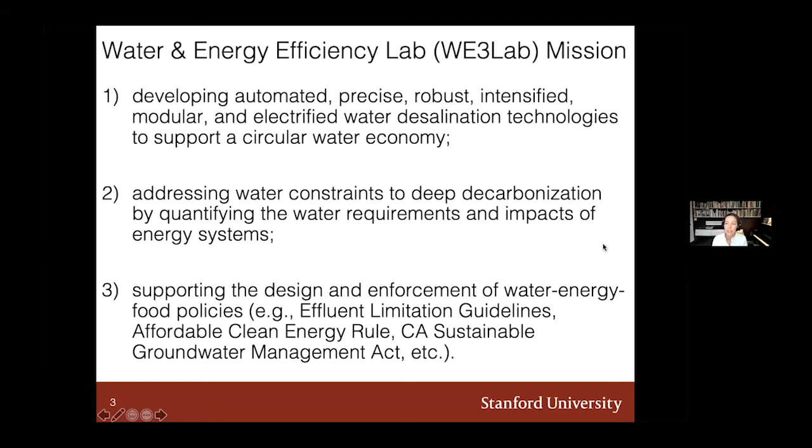The National Alliance for Water Innovation's mission is to secure the nation's water supply through energy efficient and cost-effective water desalination and fit-for-purpose reuse. The reality is that our conventional water treatment systems were really designed to exploit an ample supply of fresh water to basically treat things once through, send it through a distribution system, treat that wastewater, and be able to dispose it readily into the environment.

We know today that changing precipitation patterns, increased urbanization and water demand, aging infrastructure systems through which water is distributed, and regulatory limits on discharge are all driving water users to turn to non-traditional source waters. The issue is that in treating these non-traditional source waters, we incur more costs but also expend more energy. So we're really focused in NAWI on understanding what technology innovations are necessary to facilitate a circular water economy and exploit non-traditional water sources, including water reuse, especially to augment and secure our water supply.

A key aspect of our mission is to try to make these non-traditional water sources more cost and energy competitive with traditional sources. So we've set this goal of 90% of non-traditional water sources achieving pipe parity through our technology development efforts. But a lot of that success hinges on how we define pipe parity.

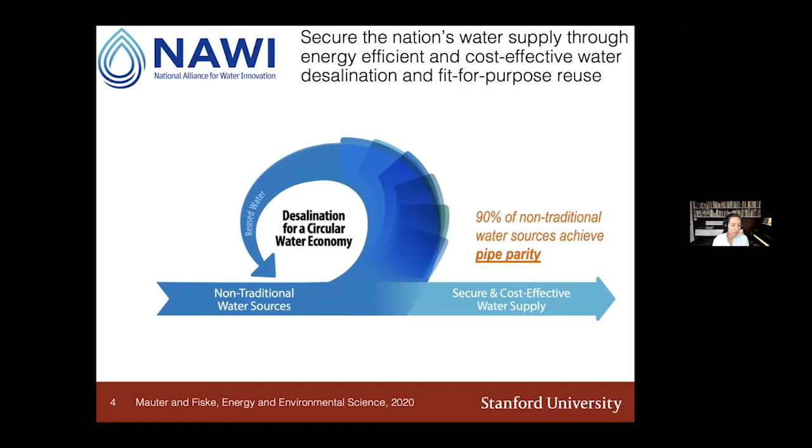I want to offer up one definition that's kind of our working definition within NAWI, which is that a non-traditional water source achieves pipe parity when the marginal energy intensity or cost is less than or equal to the next available source for a specific end user.

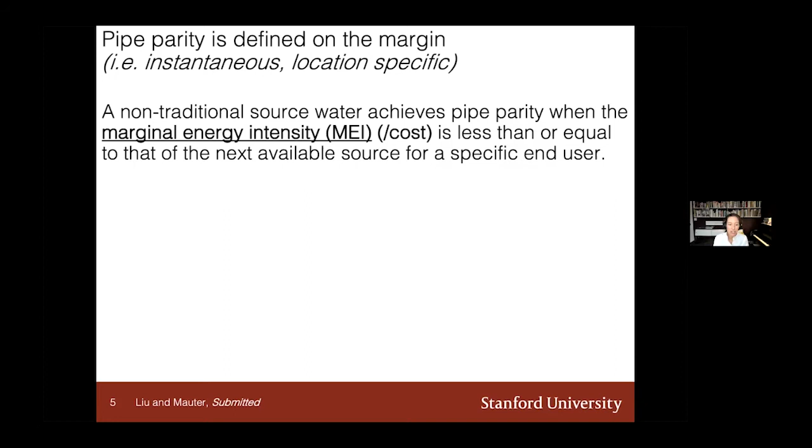So there's a lot of nitty gritty in this definition. The specific end user aspect is particularly important. The cost for one consumer requiring one water quality is very different than that of another consumer at a different node in your distribution system, or disconnected from a distribution system. But it's also very contingent on this idea that pipe parity is defined instantaneously and in a location specific manner.

So in order to get at that, we actually need to think about water treatment cost and energy intensity as only one of several stages in getting water from its source to its user. In addition to treatment, we also have transmission and distribution contributions to the overall cost and energy intensity of water supply. That's intuitive for those in civil environmental engineering, but it becomes easy to narrow our focus down to just thinking about energy intensity of treatment when doing research in the lab. So a lot of my work is trying to draw those connections between the benefits of innovations in individual unit processes and what that means for system level costs and energy intensity as a whole.

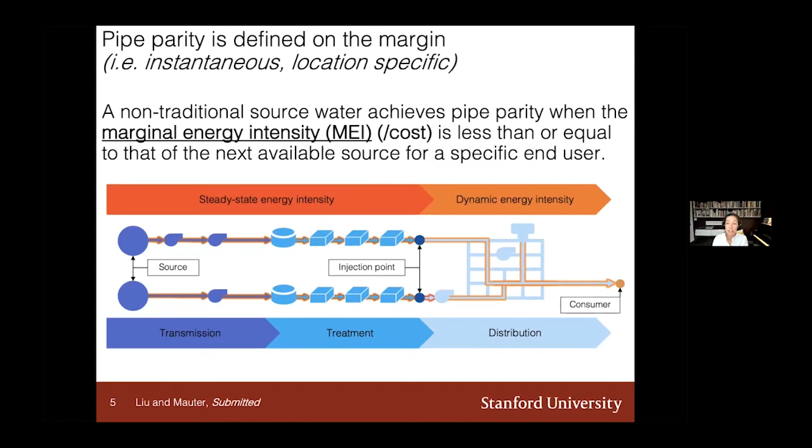So we actually did a lot of work over the past two years to try to develop a method to better quantify what the cost and energy intensity of water transmission, treatment, and distribution were as a function of where you were located in the system and the time of day. I'm going to share with you right now one example, which is how we might quantify the energy intensity of delivering water to different points in a relatively small distribution network with 330 unique consumer nodes.

What you see here is that there are 3 different sources, each with quite different energy intensities: a seawater source, a freshwater source, and a long distance water transport source. There are a couple of key takeaways. The first is that transmission and distribution energy are often much greater than the energy intensity of treatment. The second is that your total marginal energy intensity across the distribution system varies quite significantly based on where you are in that distribution system.

But on the whole, that distribution of energy intensity is on the same order of magnitude as desalination processes. We talk about water desalination as having a thermodynamic limit of somewhere around 1.1 kilowatt hours per cubic meter, and you're not actually able to do that quite that efficiently. So this range of 0.9 to 1.5 kilowatt hours per cubic meter of actually delivering water suggests that there's a tremendous amount of energy embodied in that transmission and distribution.

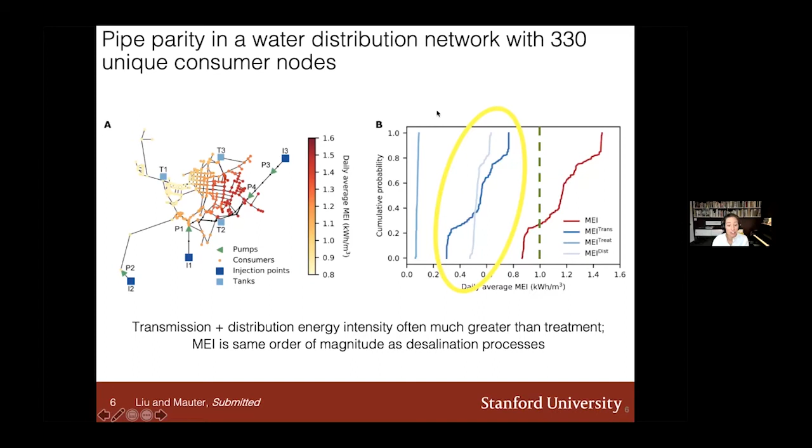So this is kind of a really interesting deep dive into this breakdown of transmission, treatment, and distribution energy. But it doesn't address what are those key challenges that we need to get there, and what that means for water treatment innovations as a whole.

And in NAWI, I think all this quantification has been really important in reinforcing an initial hypothesis that we had: that really the only viable pathway for substantially reducing the costs of non-traditional water sources is to replace the economies of scale that we've traditionally seen in treatment size. As you build a larger treatment plant, the costs and the energy intensity of that treatment tend to diminish.

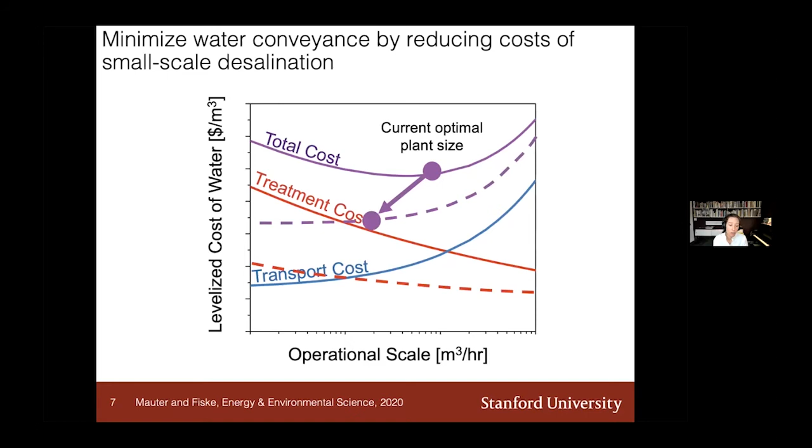But we want to replace these economies of scale in treatment with economies of scale in manufacturing. So how do you make small scale distributed systems less costly, both to build and operate, so that your overall distribution system costs, these transport costs, diminish, and your total costs shift downward significantly. I'm not going to go into a whole lot more detail about NAWI's mission, but I do want to say that we identified six challenge areas that are critical for realizing cost-effective small-scale systems.

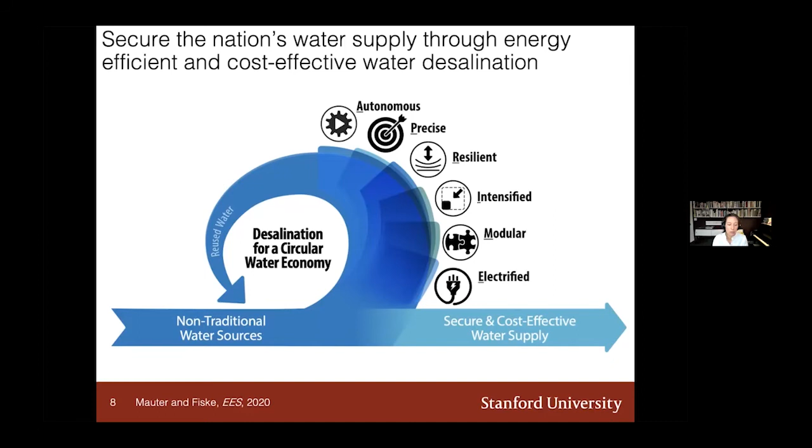I want to point out that this transition to small scale distributed systems is actually one that's been forged over the past 30 years by the energy industry. When we talk about the need for supply diversification, decentralization, or decarbonization as a driver, a lot of these features have been explored in the energy sector for a long time. New technologies like solar panels and battery storage represent a major shift in the energy industry during that time period. Water is much further behind.

We have not realized a lot of these same goals in the water space, but we are rapidly heading there. So what this talk is really about is some of the system level benefits and process level challenges for implementing 5D water grids: diversified, decentralized, decarbonized, decoupled, and demand softened, or water efficiency promoting systems. And to think not only about what that means for the water sector, but also what the benefits are of synergistic operation between the water sector and the electricity sector going forward.

In particular, we believe that these 5D attributes will increase the operational flexibility of both power and water supply systems independently, but that the greatest potential in flexibility, efficiency, and resiliency, and the greatest benefits in those areas are really going to come through coordination between power and water systems.

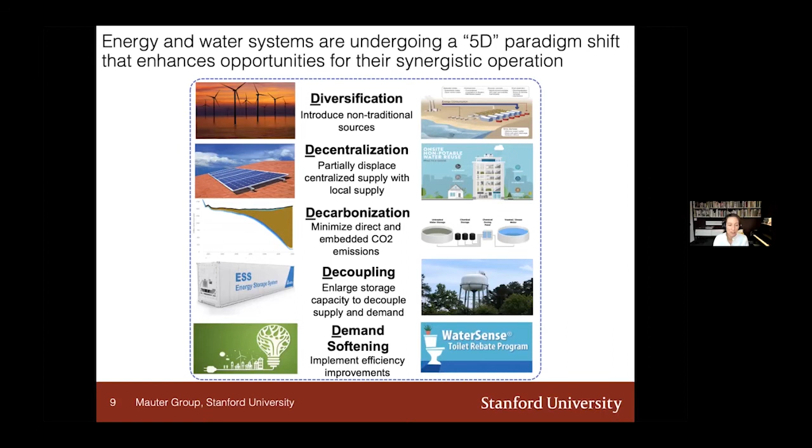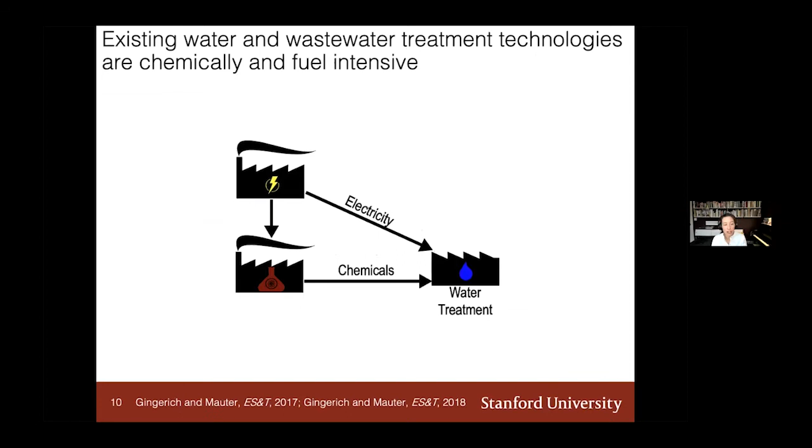So let's start with decarbonization. Existing water and wastewater treatment technologies are chemically and fuel intensive, which means that they're also carbon intensive. When we think about water treatment systems, we have energy inputs, specifically electricity inputs, and we also have chemical inputs. These chemicals actually require a lot of electricity, as well as thermal energy or fossil fuel inputs to manufacture.

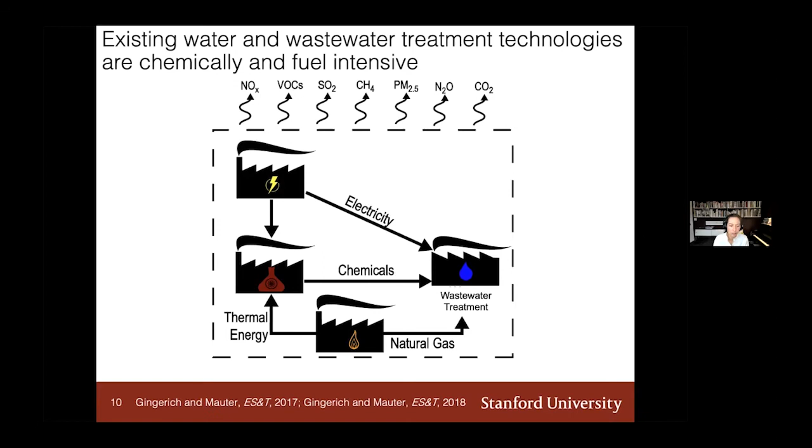One of the students I mentioned earlier, Daniel Gingerich, who's now at Ohio State, did one of his thesis papers, published in ES&T, on quantifying the human health, environmental, and climate damages associated with water treatment processes. He did this for every drinking water treatment plant in the United States and developed a comprehensive inventory. He also published a second paper that included quantification of the impacts of wastewater treatment. In wastewater treatment, you're also using thermal energy to facilitate digestion of the organic load, and you have a number of additional direct emissions from the wastewater treatment plant, including VOCs, methane, et cetera. The results of both of those studies are published in these 2 papers.

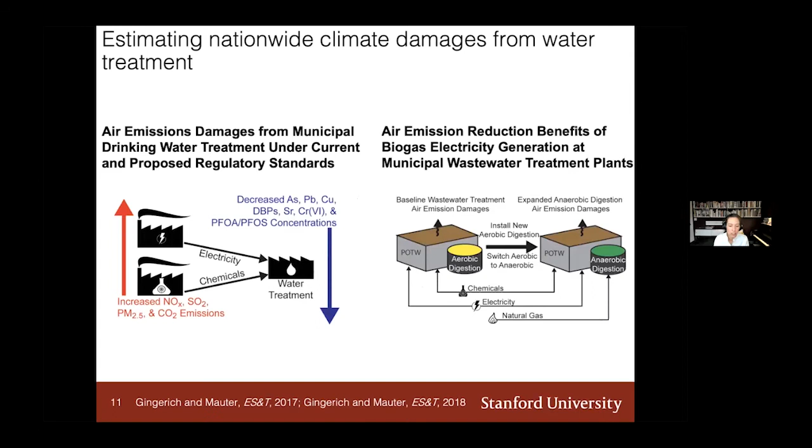But I think what I want to highlight today is primarily the carbon implications of this, or the CO2 emissions coming off of both of these systems. And when we add those up, we find that combined drinking water and wastewater treatment in the United States leads to about $750 million in climate damages annually.

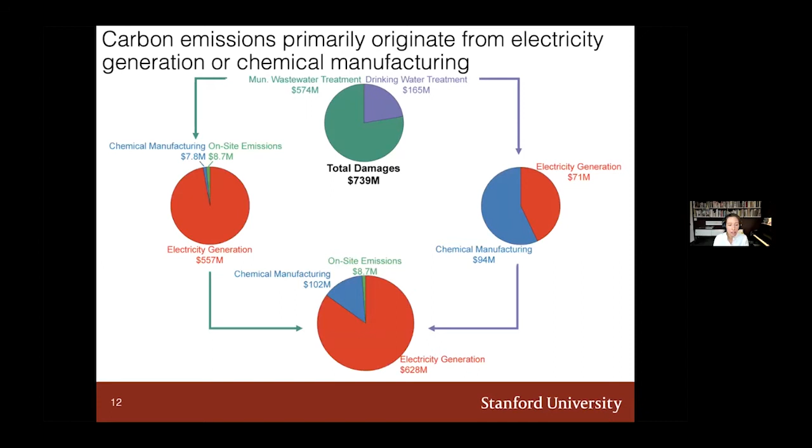What was really interesting about this, since my primary interest is in water treatment, is that in water treatment, such a large fraction of those embedded carbon emissions are originating from chemical manufacturing rather than direct electricity usage. That's very different from what we see in the wastewater sector, where most of it is consumed in aeration of those wastewater tanks, so the balance is heavily skewed towards electricity consumption. But in drinking water, we see a real opportunity for thinking about how to reduce the carbon intensity of chemical manufacturing, and what this means for decarbonization of the water sector alongside decarbonization of our electricity grid.

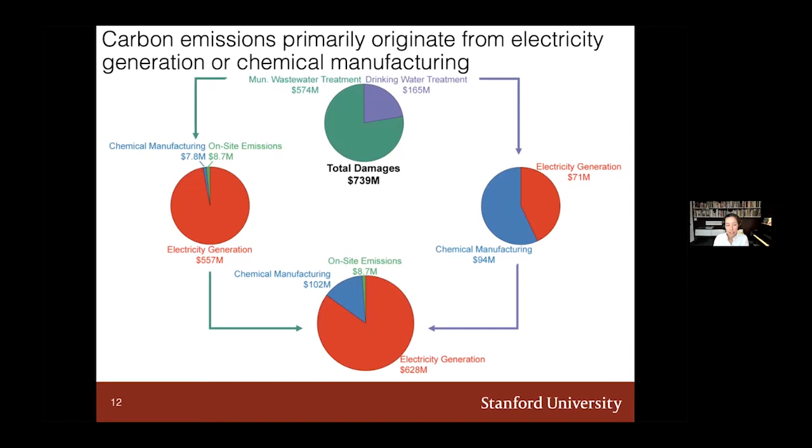When we take a step back and think about that balance of chemical embedded energy and carbon in chemical manufacturing versus direct unit process energy consumption, it kind of makes sense that it's mostly embodied in chemical consumption, because almost all of our conventional unit processes in drinking water treatment are chemically based: coagulation, disinfection, et cetera.

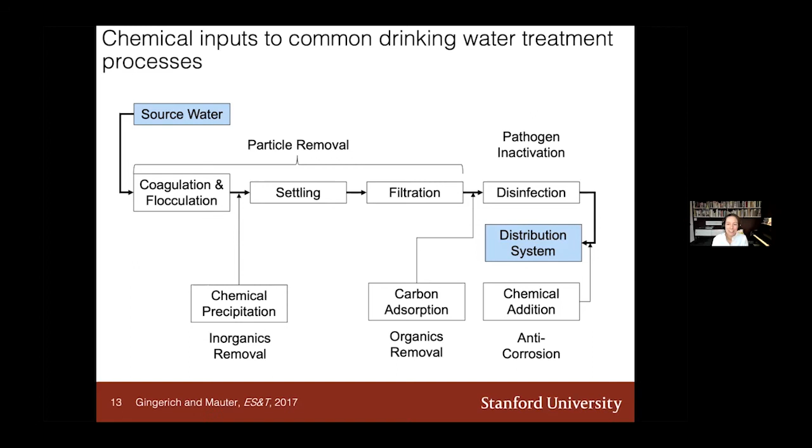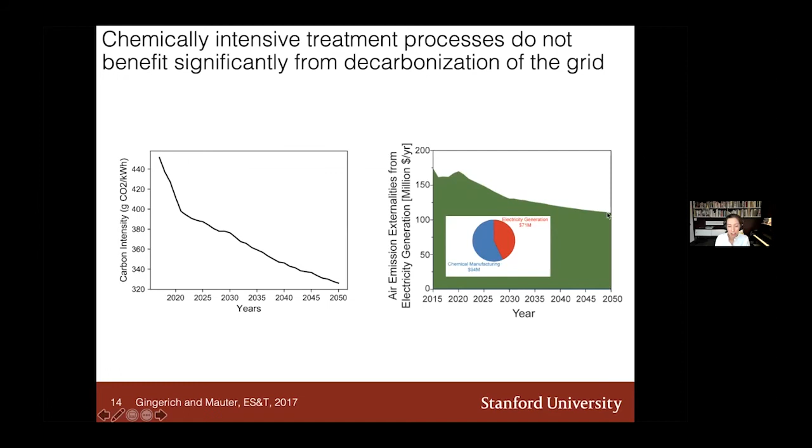This means that even though the carbon intensity of the grid is expected to decrease quite significantly over the next 30 years, the carbon emissions from our drinking water treatment systems aren't actually going to change that much. And that has two key implications.

The first is that we can either try to focus on decarbonizing chemical synthesis, but that is really difficult. It's probably going to be more beneficial to try to electrify our unit processes and displace those chemicals than to try to decarbonize the chemical industry.

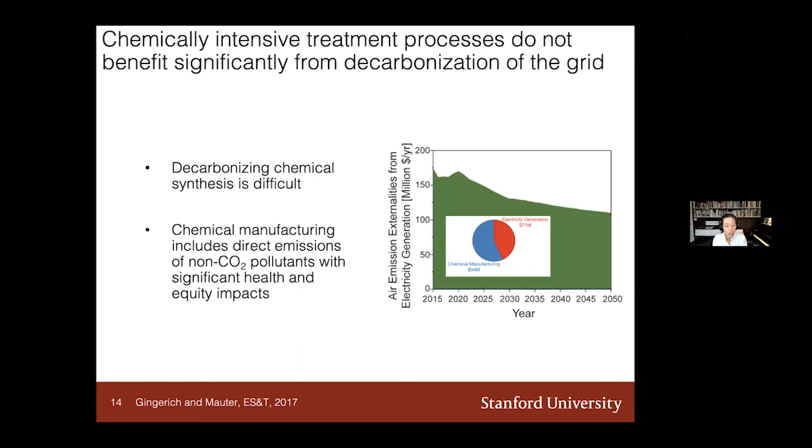The other thing I'll say is that chemical manufacturing includes direct emissions of non-CO2 pollutants that also have significant health and equity impacts. As environmental engineers aiming at a more sustainable future, accounting for these non-CO2 emissions and their impacts on human health, and in particular the distribution of those impacts, is really important.

So we had a couple of questions that we wanted to answer in a paper that's sat on my desk for too many years at this point, but I've promised my former student I will publish in the next couple of months. We took a stab at a couple of different questions.

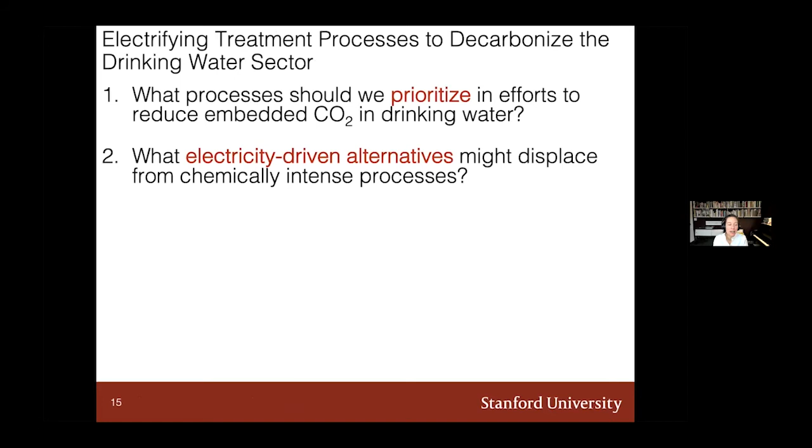The first was, what processes should we prioritize in efforts to reduce embedded CO2 in drinking water? What are electricity-driven alternatives that might displace these chemically intensive processes? How clean does our grid need to be for these alternative processes to have a lower carbon intensity? What are the barriers to adopting and implementing these alternatives? And finally, if we were to electrify our water treatment processes, what would the climate benefits actually be?

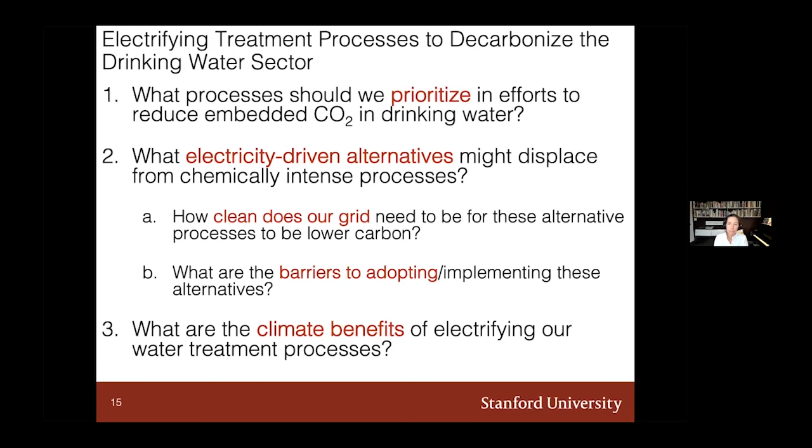What we found when we dug a little more deeply into this set of chemically intensive processes is that the bulk of them, 95%, were attributed to just 3 unit processes: coagulation, activated carbon, and water softening. So we focused on those three, and today I'm going to exclusively focus on coagulation.

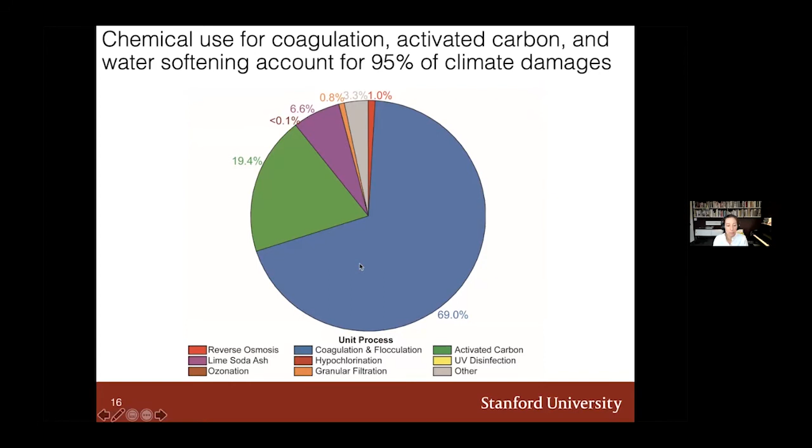So to answer some of these questions, we built a model that evaluated the climate benefits of drinking water treatment electrification. Our approach consists of 2 submodels: a technical model that's basically a process model, and a carbon model. The technical model calculates the electricity and chemicals consumed in both a conventional and an electrified alternative, and the carbon emissions submodel calculates the quantity of CO2 emitted per cubic meter of water treated based on that electricity and chemical consumption.

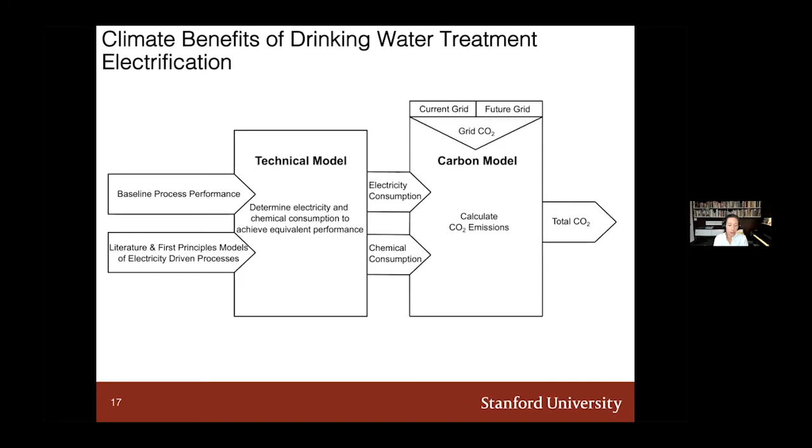Because these are somewhat different unit processes, we set equivalency standards at the water quality level instead of at the unit process level. So we needed to ensure, for instance, 90% removal of organic chemicals in order to meet that equivalency standard. I'm going to focus primarily on the removal of suspended solids and the displacement of chemical coagulation processes with electrocoagulation processes as an electrified alternative.

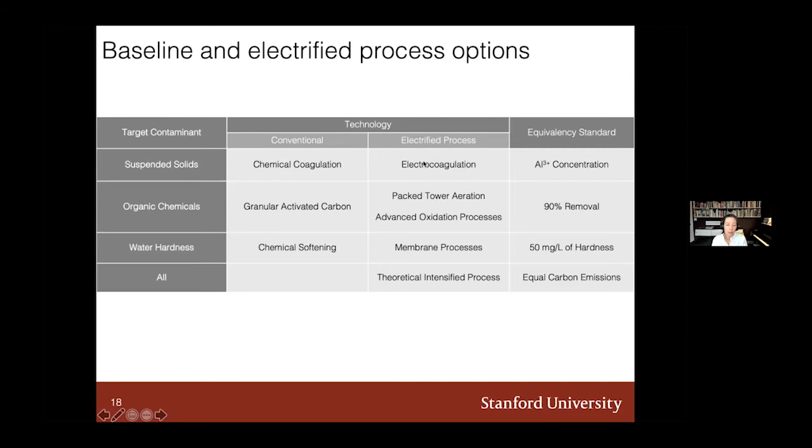The CO2 emissions of any unit process are a really complex function of process design parameters, water quality, and the carbon intensity of the grid.

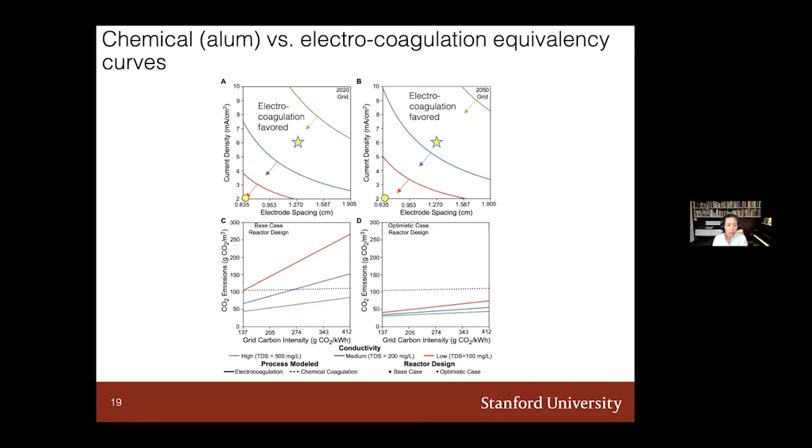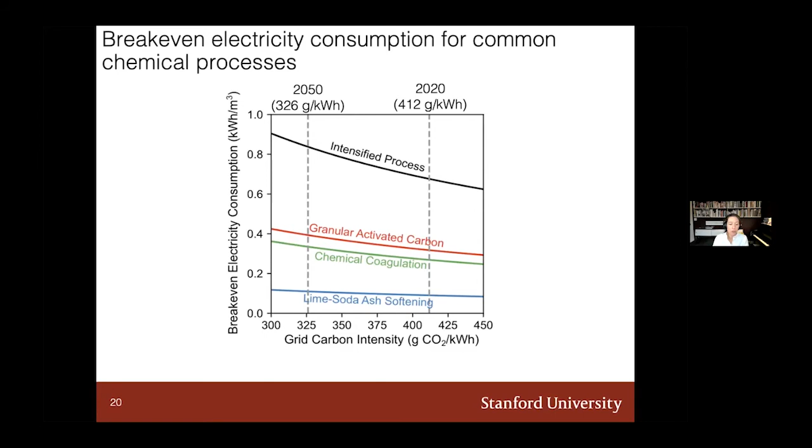Again, if the electrified process consumes less energy than that curve, it offers net carbon benefits. In addition to setting design targets for individual unit processes, we can set design targets for entire treatment trains or intensified processes that combine several unit processes into a single step. For instance, if we were to use membrane-based separations to soften, remove particulate matter, and remove dissolved organics at the same time, as long as that membrane-based process was below this curve, we would realize an overall net benefit. Looking both at the unit process and the treatment train or intensified process is a really powerful paradigm to figure out where innovation opportunities sit.

But I'll also say that we need to ask ourselves if this is really a comprehensive equivalency, right? I've just shown you all these break-even curves, but maybe there are instances in which electrified processes might actually offer ancillary services to the grid - benefits to the power grid that aren't realized in this sort of strict carbon calculation.

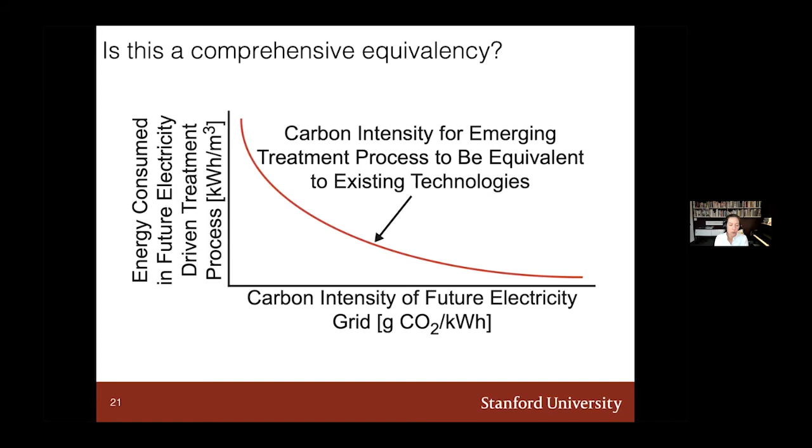That leads me to the second part of my talk, where I want to share some of our work on the benefits of synergistic operation between power systems and water systems. These 5D attributes really increase the operational flexibility of both systems, and coordination between them is enabled by the kind of high spatial temporal resolution distribution system modeling that I shared with you earlier.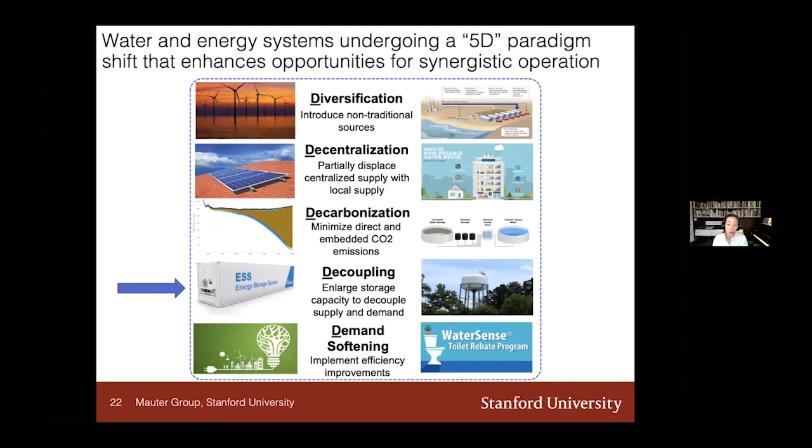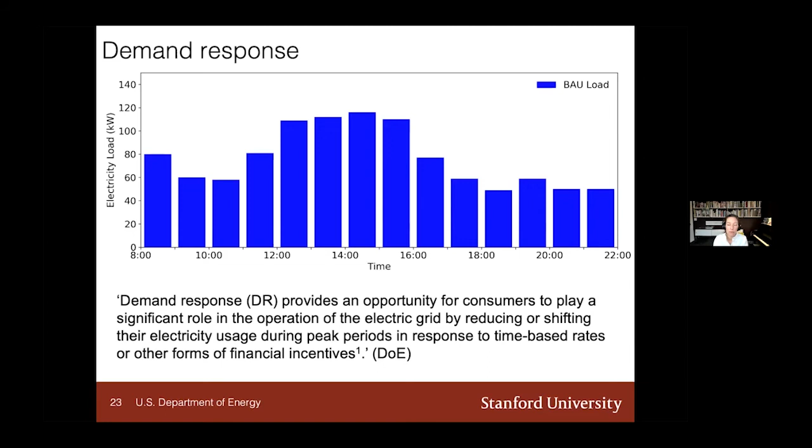Let's talk a little bit about decoupling, and I'm going to focus on demand response services. Many of you are in the water space rather than the power grid space, so I'll give you a moment to define demand response - basically, demand response allows electricity consumers to supply electricity back to the grid by curtailing their demand during peak periods, or shifting their demand to off-peak periods.

So instead of consuming electricity during peak demand time, when prices are high and load to the grid is high, we would move our demand to these lower demand periods. There's been some recent regulation that's allowed independent system operators and regional transmission operators to invite DR participation from anyone with greater than 100 kilowatt capacity for energy service provision, or for providing these demand response services. They can do that through the wholesale electricity market.

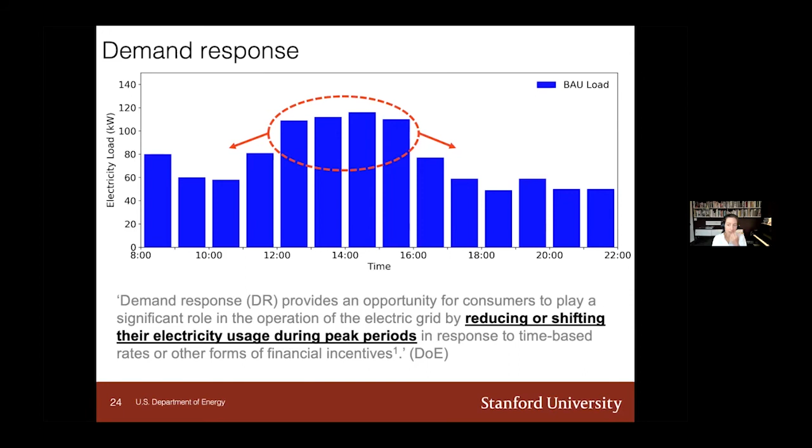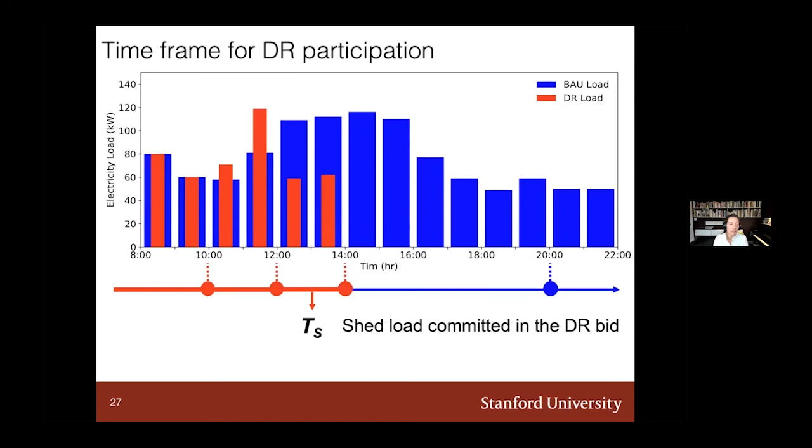There's a couple of attributes that go into this bidding process. The first is you have some moment at which you initiate demand response participation - you're notified that you'll be asked to curtail your load some period in the future. That period is demarcated by a notification period, so you have some time to prepare for load curtailment. You then actually need to shed your load, which is defined as TS.

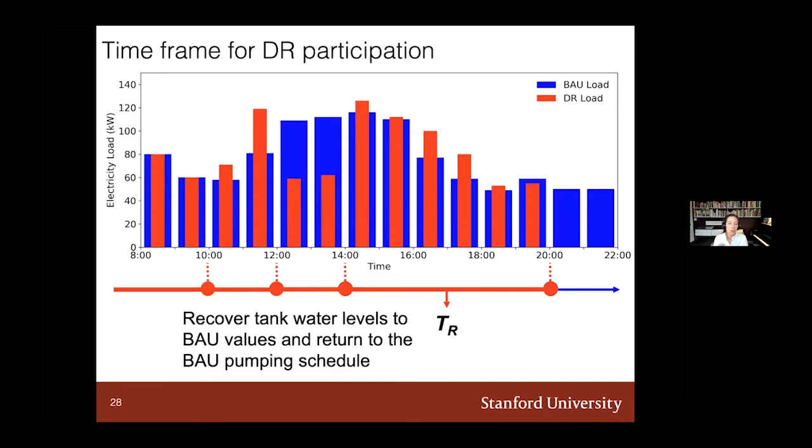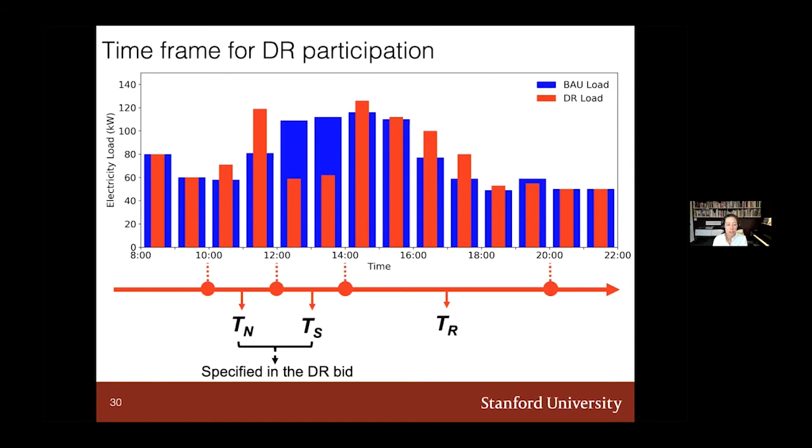And then you have a recovery period. In the case of a water treatment system, you'd want to recover your tank levels to their business-as-usual values, and ultimately return to a business-as-usual pumping schedule after this period of full recovery. These are the variables I hope you can keep in mind throughout the rest of this talk: notification, shed, and recovery. Typically the notification and shed would be specified in the DR bid, but the recovery period and its length is really a function of the risk tolerance of the water utility that wants to participate in this demand response market.

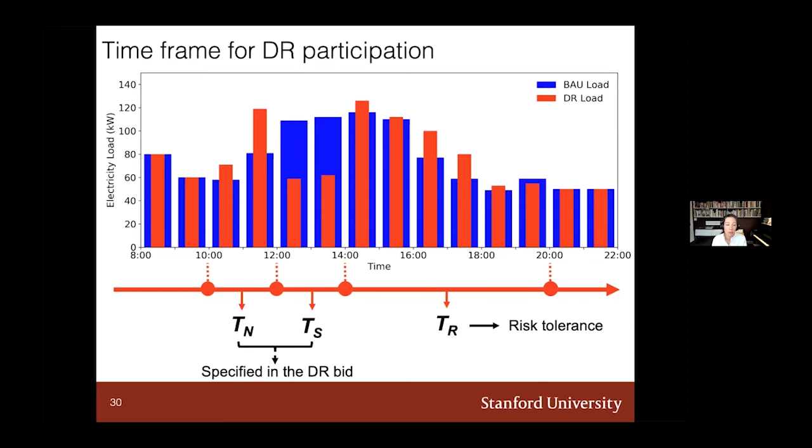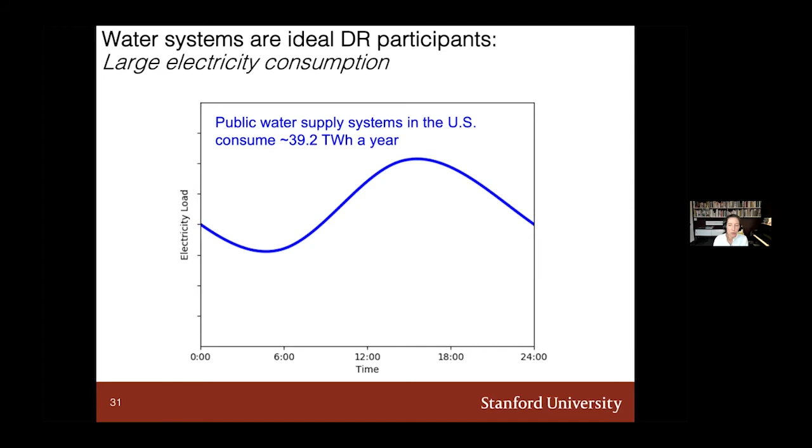So why should water utilities think about participating in demand response? Well, the first reason is that they are actually really large electricity consumers. Public water supply systems consume about 40 terawatt hours per year in electricity. They also have a great deal of time flexibility in electricity consumption because they have so much water storage, particularly in the drinking water distribution system.

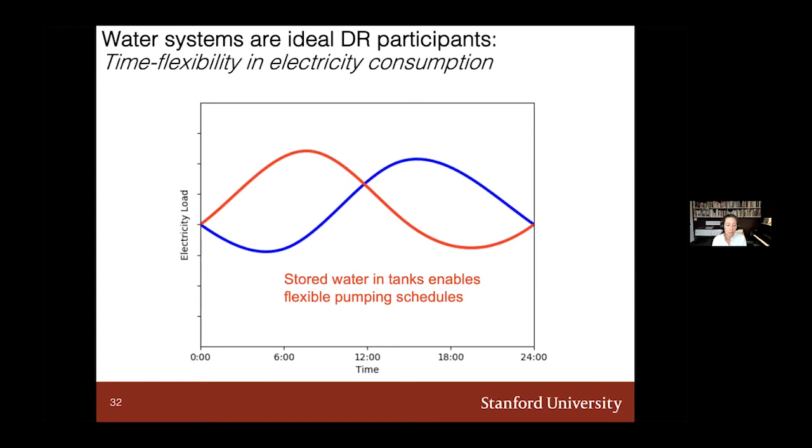It enables flexible pumping schedules, and they already do a lot of flexible pumping in order to reduce their electricity prices and use electricity when it's cheaper in the wholesale market.

The third attribute that makes these particularly advantageous is that pumping can stop instantaneously. So you can just turn off your pump, and that means you can shed load very quickly.

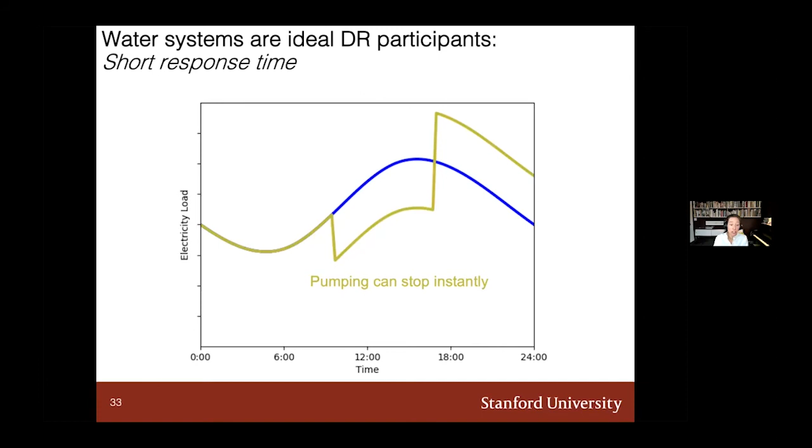There's been a lot of work on DR participation in transmission systems. In fact, one of the largest DR providers to the California grid is actually the state water supply system, and they provide a tremendous amount of DR capacity.

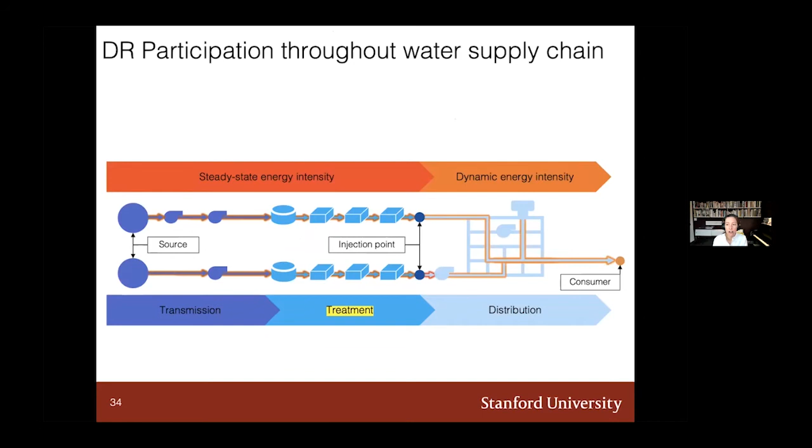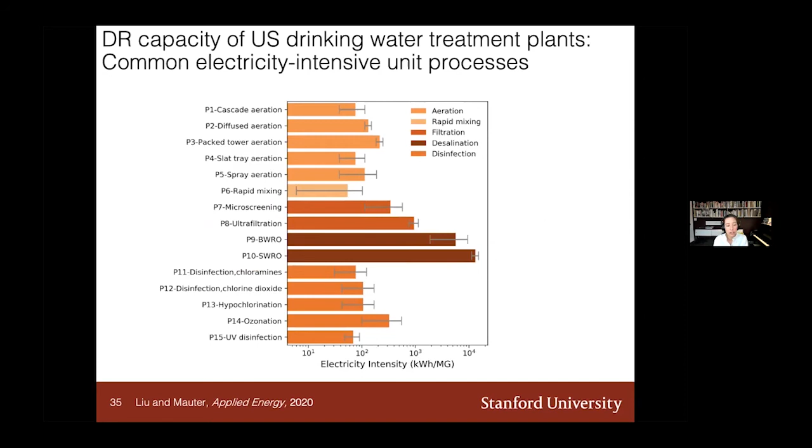There's been much less work on understanding what the potential is for water treatment to provide DR services. So we published a paper in Applied Energy last year that looked at the 15 most common electricity intensive unit processes, quantified their energy intensity or electricity intensity, and then multiplied this by the volume of water that each of the plants around the United States treat.

Of course, this volume is a function of both season and climate, which in turn influences your total daily electricity load from water treatment in the United States. And DR is not going to be uniform across the country, and it's also not going to be uniform across seasons.

So what I've plotted here is exactly how non-uniform that is. This is a plot of the aggregated daily flow and average electricity load. Load is on this side and flow is on this side in blue, for drinking water treatment plants across the United States.

The error bars in this load refer to our uncertainty in the electricity consumption of installed unit processes. We just don't know exactly how efficient each plant is, and there's wide variability in the efficiency of an individual unit process. The less efficient it is, the more DR capacity you have; the more efficient it is, of course, the less you may have.

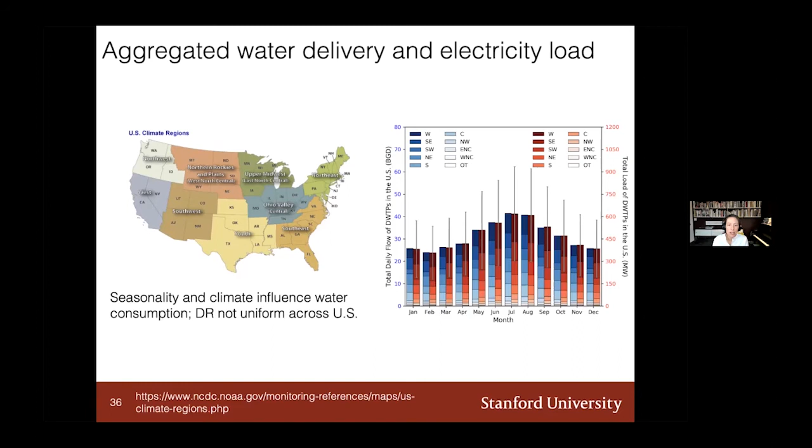So in addition to looking at the snapshot of how much energy or electricity is consumed, this also helps us understand and value the flexibility of that load.

As we previously discussed, the flexibility is going to be a strong function of the capacity of the plant to rebound by exceeding normal treatment levels during the recovery period.

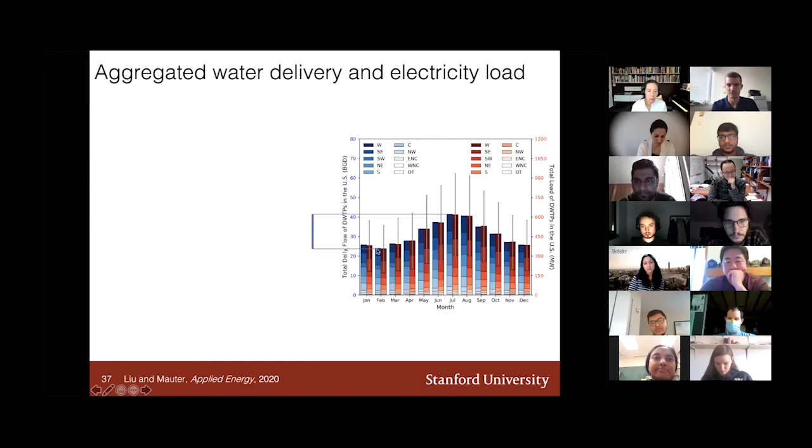One way to think about this is the difference between your July water consumption, or your peak water consumption, and your February water consumption. Obviously, your plant is designed for July flow. So in January, February, your plant could easily recover from that curtailed treatment.

In practice, however, this R value, or this recovery, is going to be much larger because plants are commonly designed for future water demand. They're also designed to be able to withstand treatment train maintenance and other process upsets.

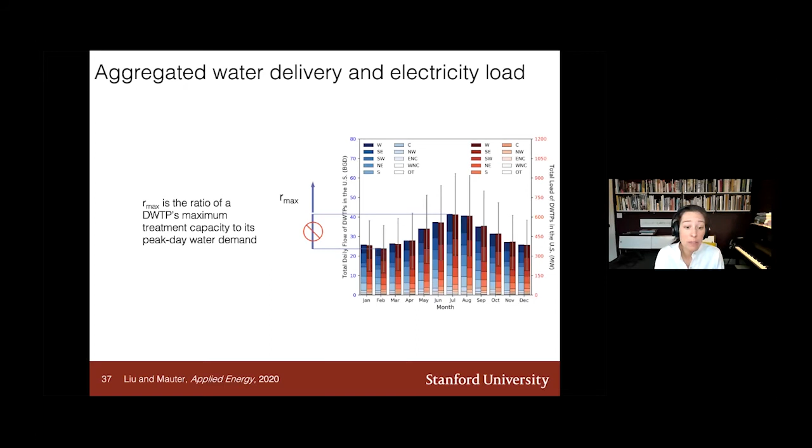So in this study we adopted a very conservative definition of R max as the ratio of a drinking water treatment plant's maximum treatment capacity to its peak day water demand. The data set we were using, the SDWIS, actually reports the design capacity and its peak day water demand, so we were able to do that at an individual plant level.

So this helps give us a broad overall assessment of whether this is a meaningful contribution. And I'd say yes, in certain periods, especially for short load shedding periods and plants that have a large difference in treatment capacity and design capacity between summer and winter months, we can make a meaningful contribution to energy services provision in many states, particularly in the West.

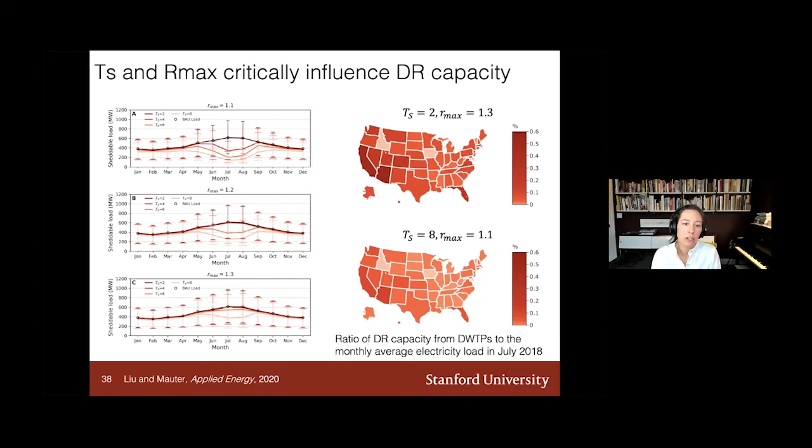The other thing that's interesting to note is that this is probably going to grow significantly over time. We've seen an incredible uptick in the adoption of membrane-based separation processes that are very electricity intensive relative to other separation processes. Further process electrification, adoption of RO, and electrocoagulation would also increase demand response capacity.

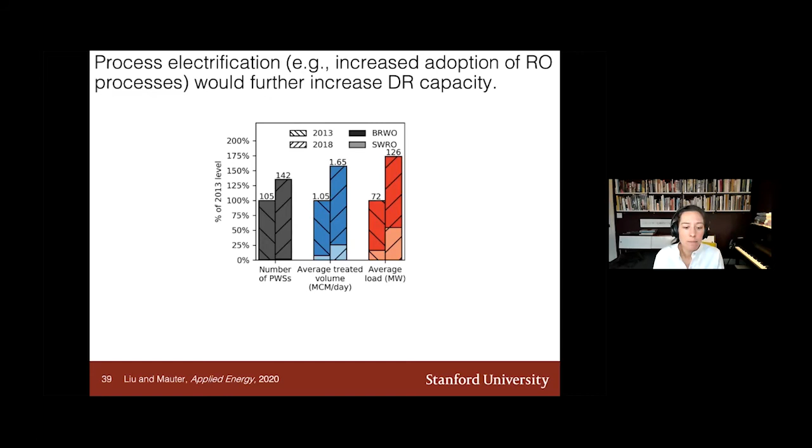There's a lot, and I say that optimistically, but I also want to say that there's an amazing amount of research that needs to be done in just how sheddable this load is and what it means for how we actually operate these unit processes.

So, this is a Canadian water treatment network talk, so I want to give a shout out to Amy Bilton, who's at University of Toronto, who's done a little work on the sheddability of load for membrane-based processes and what that means for the longevity of those membranes, for instance, and how you might want to manage those membrane systems differently if you thought you were going to be ramping and trimming your operation on a regular basis.

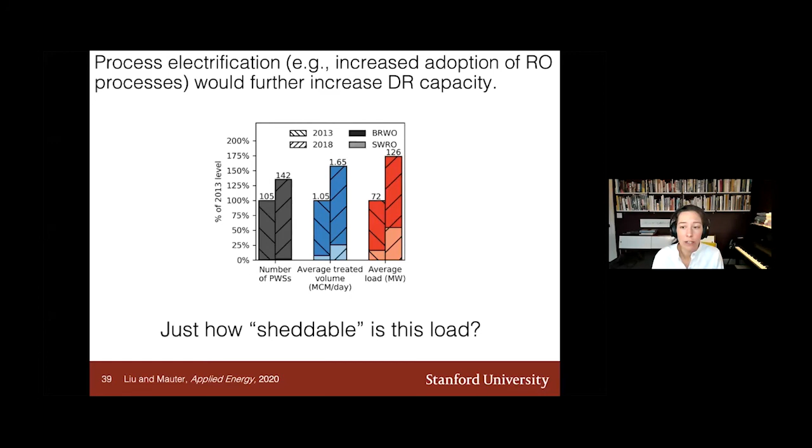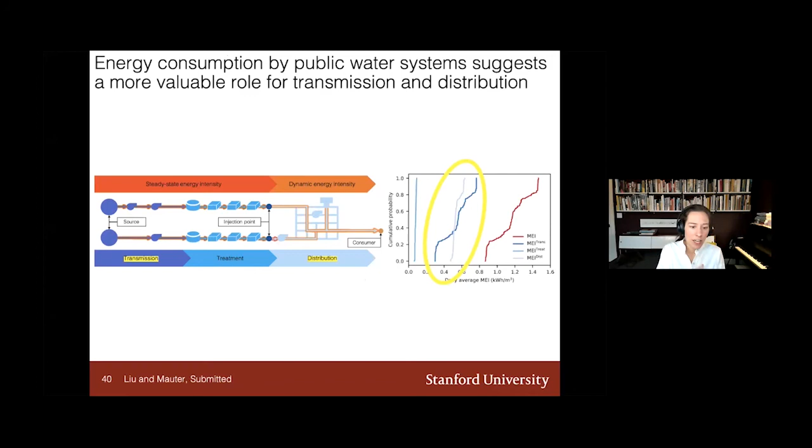So that was kind of a highlight on treatment, but as I mentioned, most of your energy intensity is actually embodied in transmission and distribution. A lot of work has been done on transmission, so I'm going to focus here a bit more on the distribution side. We also published a paper in January 2020, about a year ago, on a risk-aware decision support tool for demand response and water distribution systems. We did this for a skeleton distribution system in the UK, serving approximately 20,000 people.

What we asked in this paper was, if we use that optimized pumping schedule as the baseline, we can still ask what additional load shifting capacity pump scheduling might provide if an emergency demand response call was issued. Typically higher rates are paid for these emergency demand response calls, so it's a real opportunity for profitability, but it also helps to do things like stabilize the grid.

The Texas grid shutdowns last month during a cold snap are a really good example of where, when you have grid instability, it can lead to widespread electricity outages.

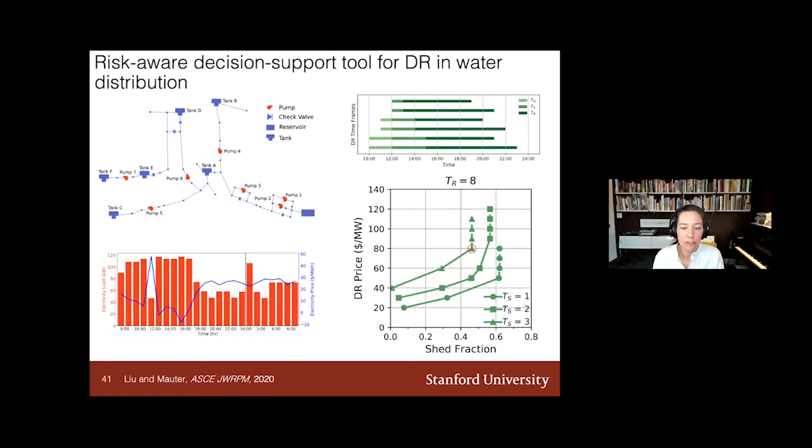I want to wrap up by talking a tiny bit about some of our work in demand softening. Demand softening could include a lot of different things, like water efficiency improvements or distributed water reuse platforms.

I showed you this slide earlier where we were focused on developing a flow backtracking method for instantaneously and spatially resolved analysis of the marginal energy intensity of supplying an individual consumer. While this is really useful for that, this method is also useful for several other applications.

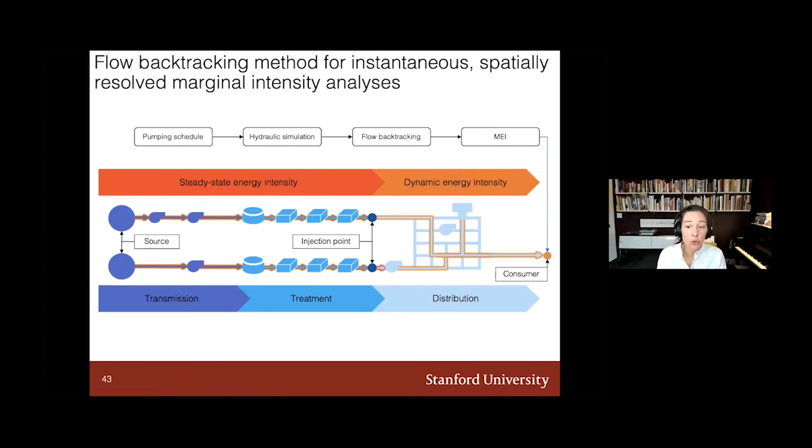The first is that it's incredibly useful for understanding where to invest water conservation dollars. Where do you deploy water efficiency interventions? Where do you promote water recycling, and where in your distribution system do you site water reuse facilities? It's also a very useful tool for enabling a regulator or utility to establish efficient time and location specific water prices. It could also be used as a tool for realizing carbon reduction goals without costly infrastructure upgrades. If you convert this to CO2 emissions instead of dollars, you find there's a tremendous amount of variability in your CO2 intensity of distribution as a function of time of day.

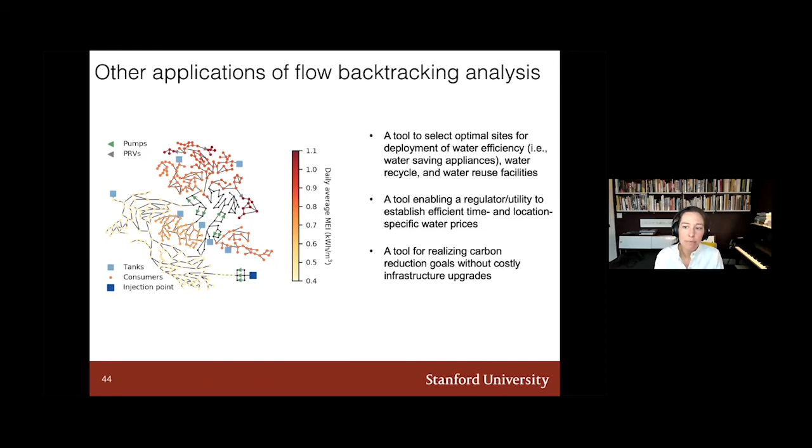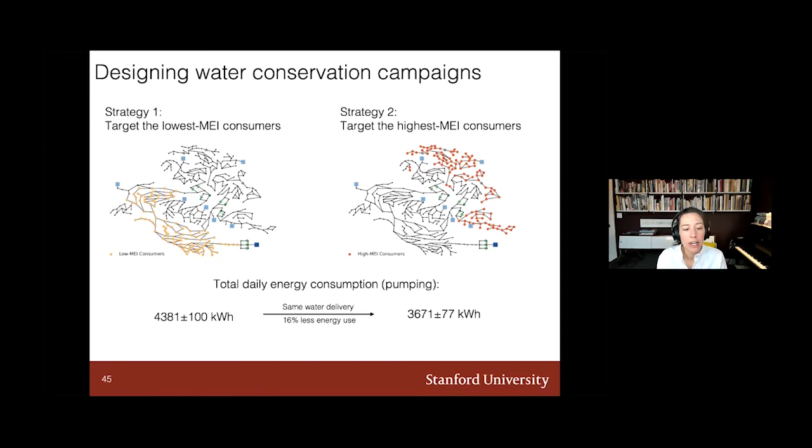Let me provide a couple of examples in designing water conservation campaigns. If you were to target the lowest MEI consumers, versus the highest MEI consumers in the single source network, you would deliver the same total water to those consumers, but you'd save 16% of your energy.

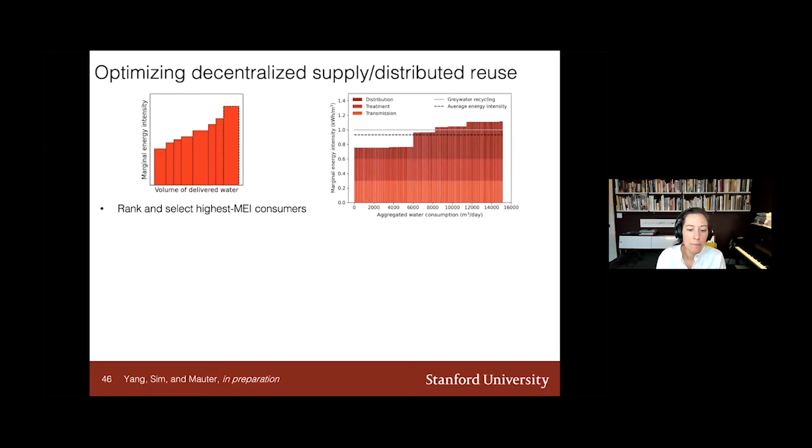Another example application is to figure out where to deploy decentralized supply and distributed reuse systems. Where do you deploy a small scale water recycling unit or potable water reuse unit? There's a couple steps in that process. You'd want to rank and select the highest MEI consumers, then understand how the marginal energy intensity compares relative to the consumers' energy intensity within their grid. Then you can determine the maximum fraction that is satisfied by that decentralized supply for each of those consumers.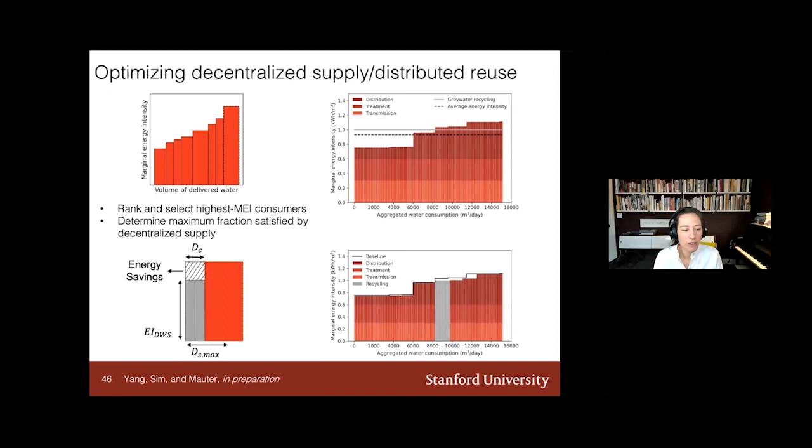And rebuild this distribution curve, or CDF, of all these different consumers in the presence of these water recycling units. What this shows is that anywhere it's white represents an energy savings relative to the status quo. We can use this to say it's actually significantly better to site a recycling unit in these locations than in some other locations. That's a paper that has now been submitted as of this week.

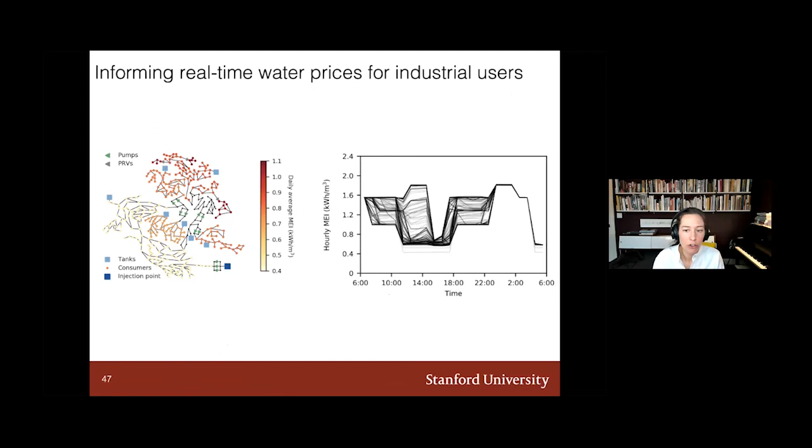Finally, we can use this to inform real-time water prices for industrial users, which we don't really do today, but there's a tremendous opportunity to incentivize things like irrigation in the middle of the night instead of the middle of the day, where you might have both higher electricity prices, but also some issues with ensuring stability of the grid and minimizing the costs of water distribution for those utilities.

All of that is to say I think there's a tremendous opportunity for a 5D revolution in the water treatment and distribution space, but the real benefits are going to come through synergistic operations of these two rapidly evolving infrastructure systems. I think there's a lot of additional work to be done here, and hopefully as the next generation of environmental engineers, you were excited enough about this talk to be inspired and work on some of these challenges.